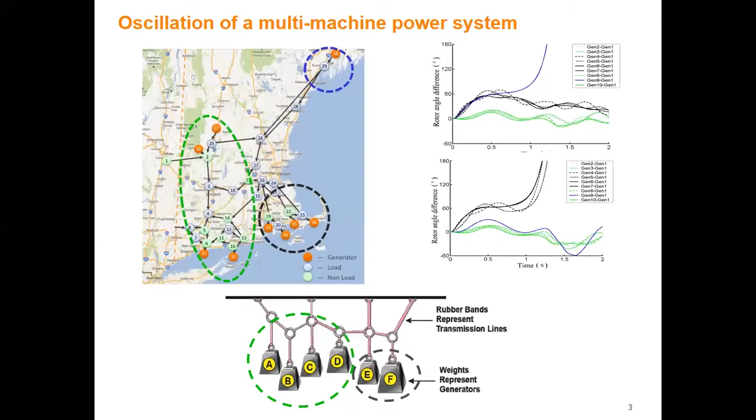Let's calculate the frequency for such a system. If it oscillates, it will oscillate at a certain period. And if it's a linear system, the linear system only has a certain number of frequencies, and each of them is actually constant. That's why we call them a harmonic system.

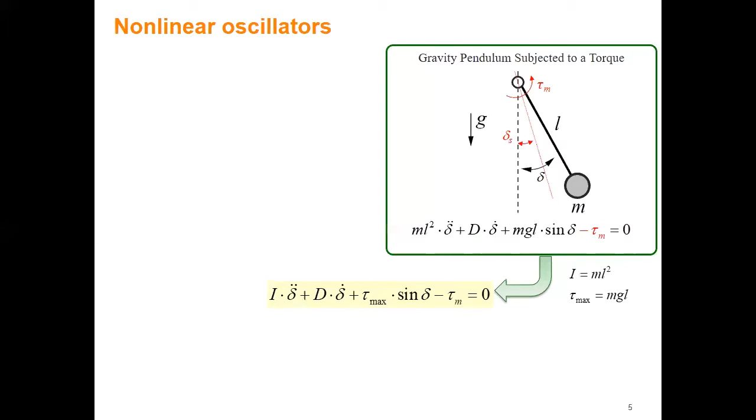But you also can define the inertia. You define this part as the inertia, for example, and you also can define the maximum torque. The very interesting thing is it becomes exactly the same system. So for the simple gravity pendulum, when you add a constant torque, that is equivalent to a single machine infinite bus system. Okay. So what is the infinite bus for this pendulum system? The infinite bus is the Earth. Okay, that's why that makes a lot of sense.

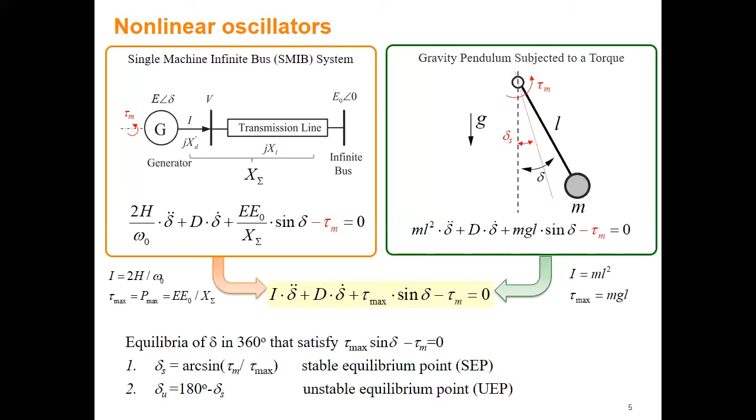And in this case, the infinite bus is just another large system. So we don't care what it is. It's too large. It won't move and it won't change any voltage, any frequency. So we just need to study this system. This system has 2 equilibrium points in 360 degrees. The first one is this one. The other one, you can easily know, is 180 degrees minus delta s. So there are 2 equilibria; the first one is stable, the other is unstable. I think many people already know this conclusion.

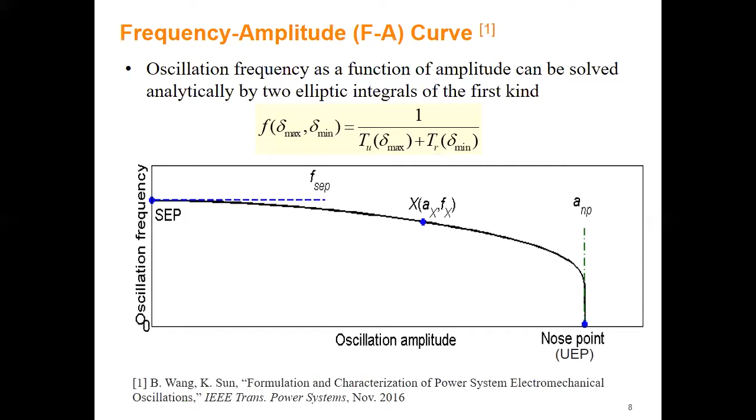But if you have damping, it finally will go back to the equilibrium. So actually, the distance between the lowest frequency point you can reach and the nose point actually tells you the margin of stability. So we can define that one to be the stability margin. Okay, so for such a nonlinear oscillator, you can analytically solve such a curve, and if the system is too complex, the theory tells you it's still somehow such a curve.

Okay, so when the system reaches the unstable equilibrium point, the frequency will lose its definition, so it will go to some nose point. And you can use a data-driven approach to try to fit such a curve. That's doable. Once you have this curve, all the system behavior will become monotonic on this curve, which is very easy to analyze the margin of stability. There's more detail in that paper if you have interest in this work.

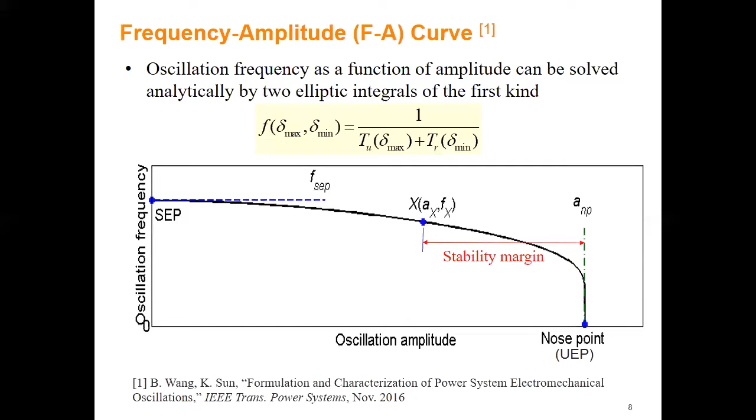So how about the multi-machine system? All the previous case studies are about a single pendulum. A single pendulum versus the Earth is actually a two-body system. A single machine infinite bus system is also a two-body system. But if we add another machine, we have a three-machine system, which becomes a three-body problem. So is the FA curve still true for such a system?

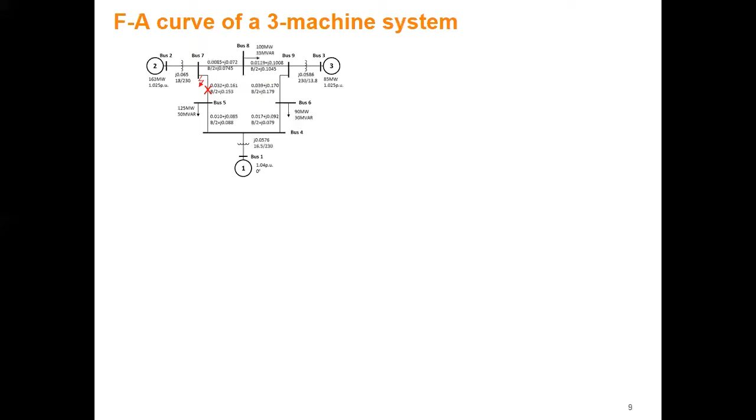This system is actually a six-dimensional system. It's a three-body system. Each machine has two state variables, which makes a six-dimensional nonlinear system. If you use one angle as a reference, you can eliminate one dimension, so it's a five-dimensional nonlinear system. And if you also define that all the damping of such a system is uniformly distributed among the generators, proportional to the inertia, you can cut another dimension. So you can simplify such a system into a four-dimensional nonlinear system.

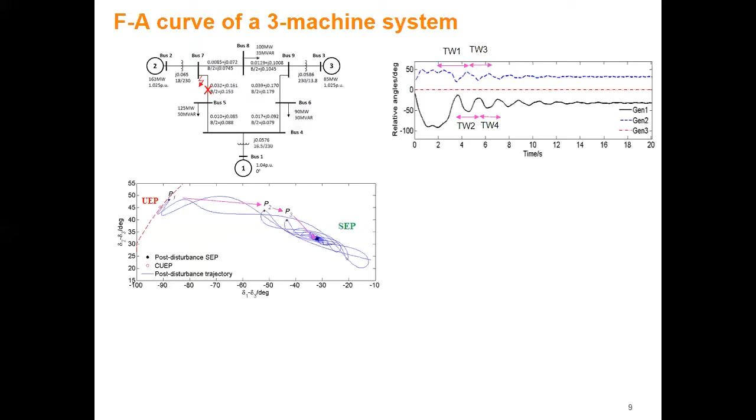This is one way to visualize. Another way is, if you're lucky, you may choose this visualization, which looks much clearer than this one. This is fuzzy, right? You don't understand what is happening in the system. But for this one, because you choose a better coordinate to visualize the system, you can tell. After the disturbance, it will jump to a point which is very close to the UEP, and finally, it will go back to the equilibrium.

Okay, so for such a complex system, if you use the traditional way to analyze the dynamics in the higher dimensional space, how easily you can obtain the result really depends on which coordinate you choose. If you choose the wrong coordinate, it's very hard to get useful information. But you can also try to generate an FA curve. The FA curve also shows it's always monotonically changing. If you have a disturbance, it will move to this point, and finally, it will come back to the stable equilibrium point. So the FA curve gives you a clear display of what's happening in the system.

So to explain why the system may have a lot of chaos before coming back to the equilibrium, this is an analogy. It's not very accurate, but it just gives you some idea. For the linear system, you can think about that the manifold is somehow linear, which is a hyperplane. So this is the blue one.

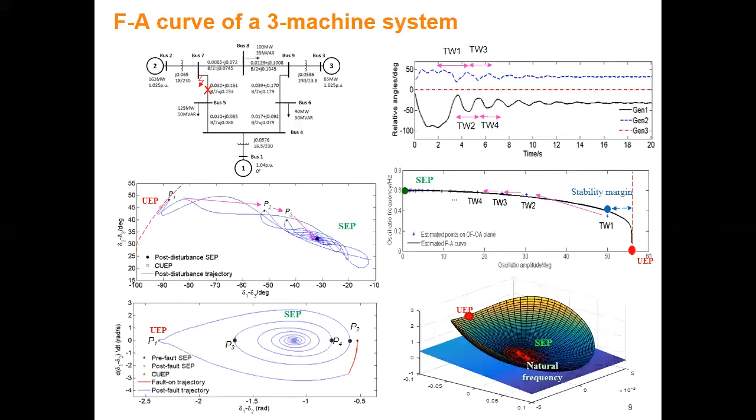But when the system becomes nonlinear, the manifold will be this concave surface. It's tangent to that hyperplane only at the equilibrium. Because this surface is concave, this manifold may also have some saddle point. The saddle point indicates an unstable equilibrium point. So that's why when the state deviates from the bottom, the frequency will change, and the system will not be like the harmonic oscillator anymore.

So how about the even larger system? Let's consider the 179-bus system. This one is a simplified version of the Western interconnection. We simulated some events very similar to the West Coast blackout in 1996. There are a lot of disturbances happening on the California-Oregon intertie to cause the separation of the two areas. If you keep adding the disturbance, you will see the oscillation grow. This represents the angle difference between the two areas.

And you can tell the waveform is actually pretty clean, which means there's one oscillation mode dominating the system oscillation. That mode is about 0.2 Hertz. If we are especially interested in that mode, we can draw this FA curve. After the first event, that's only part of the FA curve. The system state doesn't go too far away from the equilibrium, so that's why it's a very short FA curve.

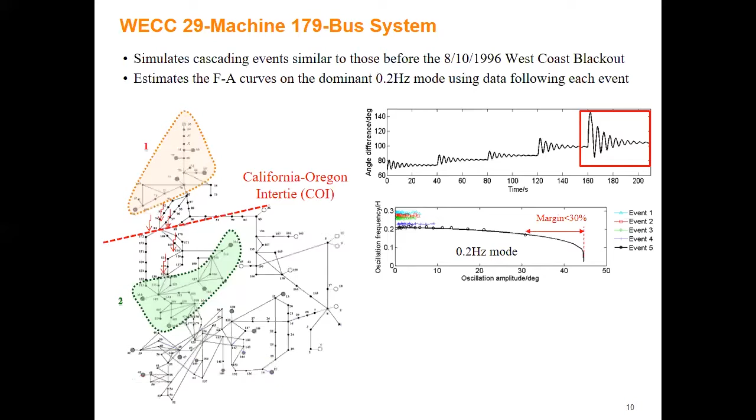But when you keep adding the disturbance, finally the largest one before the system loses stability almost gives you the entire FA curve. Actually, the system reached this point, which is less than 30% of the margin to instability. So how about the other oscillation modes? You can actually draw the FA curve for every dominant oscillation mode. Because the system is too complex, it's not easy to derive the formula for the FA curve, but you can try a data-driven approach. You can energize only one specific mode, and the system will have that oscillation. Using the data, you can draw those FA curves.

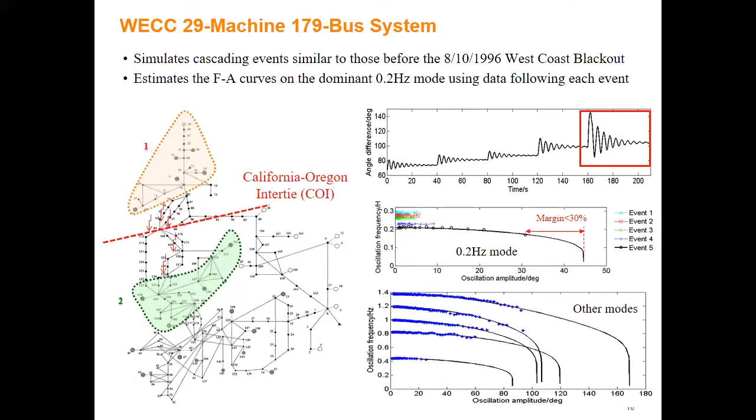So this could be some idea which can generalize to multi-machine or n-body systems. Okay, so that's almost the first topic. The second topic is some thinking following this first topic. Let's think about the n-machine power system. If we do the small disturbance analysis, which means we only have very small disturbances such that the system can be linearized, like this one, that's a linear system. And for a linear system, we can always do linear modal decomposition.

Rigorously speaking, all the eigenvalues should be different; they shouldn't have the same eigenvalue. We can do linear modal decomposition by introducing some orthogonal matrix, where we transform the original system to a new system. In the new system, this lambda is a diagonal matrix, so it decomposes all the modes. Each mode is represented by only a single state variable of the new system, related to a lambda eigenvalue. The real part of that eigenvalue is damping, and the imaginary part represents the frequency.

So this is a linear system. For a linear system, if it's oscillating, we don't worry too much. No matter how large the system is, we just need to identify which eigenvalue is critical, that is, very close to the imaginary axis, right? We try to do some control to improve the damping, and the system can be damped. But for a nonlinear system, it's a completely different story. There's no such modal decomposition.

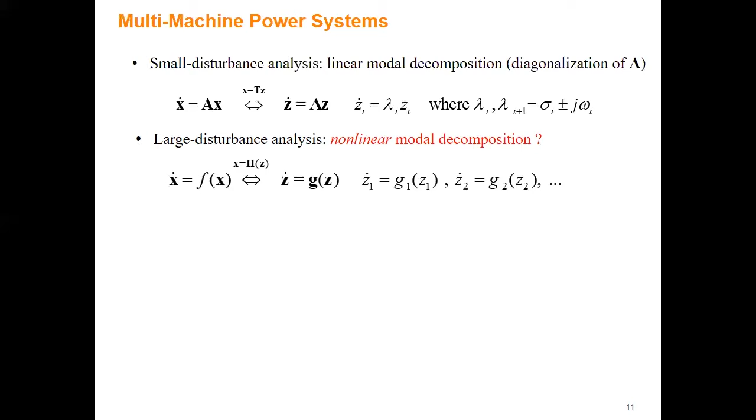You can tell, in this system the state variables are placed in a vector. Each element is governed by a nonlinear system. It's still nonlinear, but it doesn't couple with any other oscillator. So can we do this? If we can do this successfully, for this multi-machine system, if this is the mode which is going to cause instability, we don't have to study the original 10-machine system. We just need to study the system associated with this mode. That's very simple. Even though it's nonlinear, it's 1 degree of freedom, very similar to the pendulum system. That can simplify your analysis, and you can even draw the curve representing that mode. So, how can we do that?

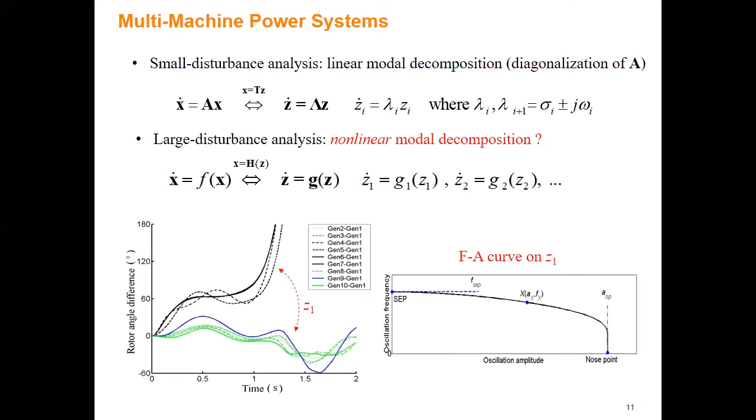So which means we want to do somehow decoupling among those modes. That's an original N-machine system or N-oscillator system. Actually, each one could be a nonlinear oscillator. They couple through the connection. For the power system, they couple through transmission lines. For that pendulum system, connected by rubber bands.

This is the original state space, which is X. And we want to introduce a new state space, which is Z. By introducing this nonlinear transformation, we decouple the original system into many oscillators. The number is n-1. So why is this n-1? Because an N-machine system has only n-1 degrees of freedom. Because if you use one machine as a reference, where does the number n go? That one becomes a non-oscillatory mode here, but that's not important to us.

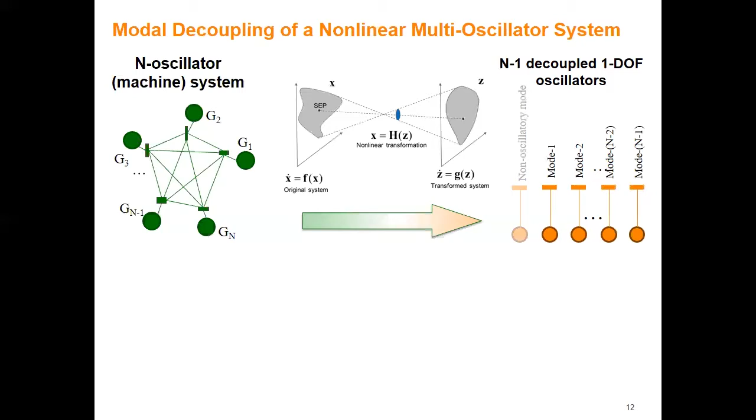That is important to frequency control. For example, all your generators speed up from 60 Hertz to 62 Hertz. That is not secure in terms of frequency. But all the generators are still stable, they're still coherent with each other. So when we study stability, we don't really care. They're entirely going up or going down. So that is represented by this non-oscillatory mode. And we have interest regarding the rest of the n-1 oscillators.

How can we do that? And there's a hypothesis. So the dynamics of an N-machine system in the neighborhood of a validity region regarding the equilibrium can be decoupled into dynamics of n-1 nonlinear oscillators. And each oscillator is a 1 degree of freedom system. This is what we get and also what we hope.

Okay, and if there's such a transformation, first of all, the transformation must be non-unique. Why? Because each decoupled oscillator depends on the desired modal nonlinearity. So I will explain what it means, and it also depends on the desired size of the validity region. So if your validity region is 0, which means this decoupled system can be applied to a region of size 0, which is just the equilibrium point, this transformation will downgrade to a linear transformation, to the diagonalization of the linear model of the system. But if you want a bigger region, the transformation will be more complex.

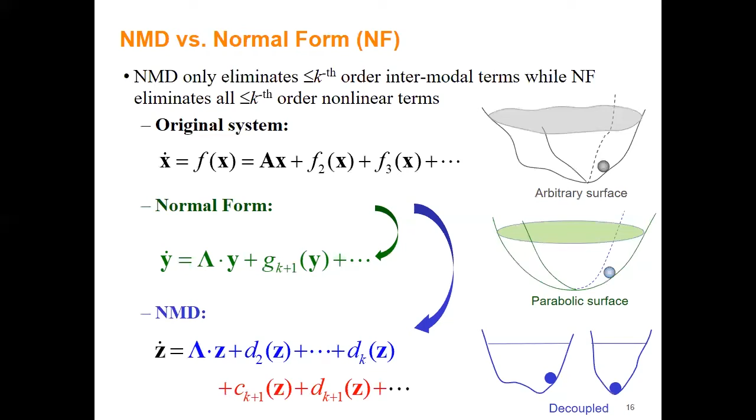Okay, so how much time do I have?

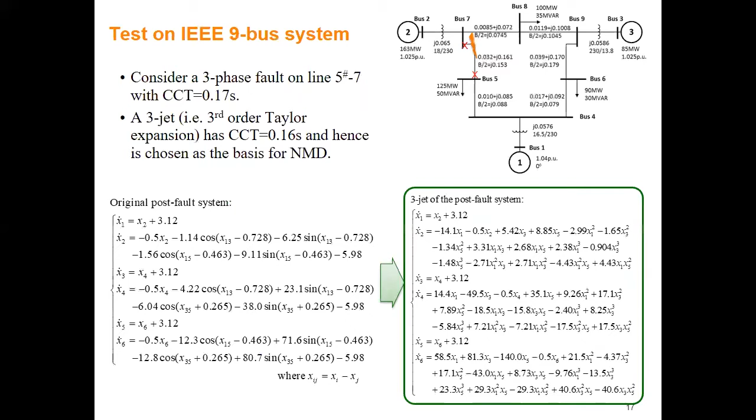Okay, I'll quickly go through some power system examples. This is a three-machine system. In order to apply the approach, we use nonlinear mode decoupling. We get a Taylor series for each nonlinear function, which is a Taylor expansion and approximation. We only go up to third order. The first decoupled system represents the desired modality, which is the same as the single machine infinite bus system. The second is another one we try to compare with that. And this is the normal form. You can tell this is a linear system.

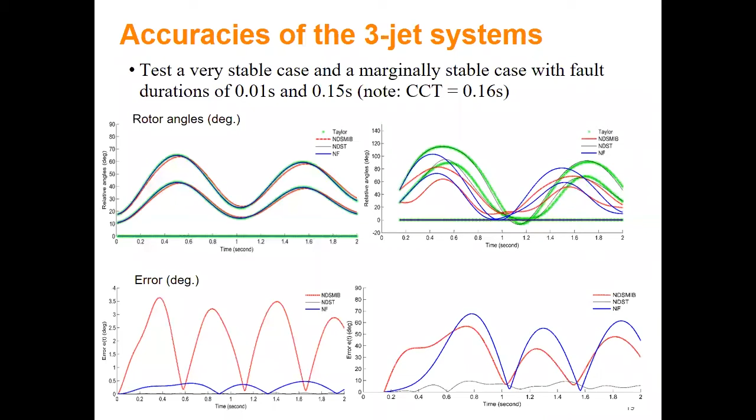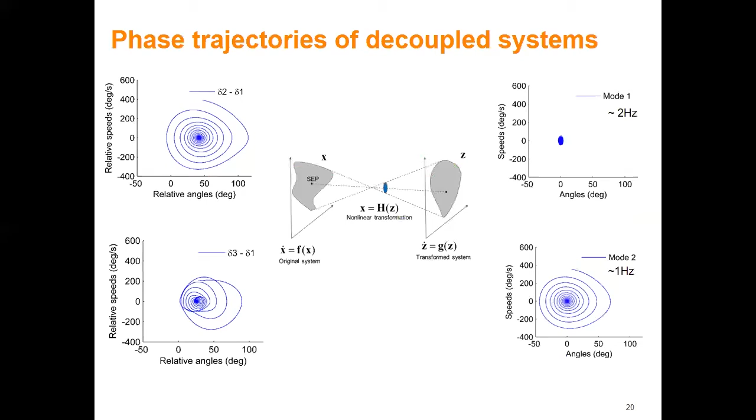And to show the system dynamics on the phase plot, that is the original phase plot in the original space. After transformation, you can tell there are two modes, right? The dynamics are mainly happening on mode number two. But for mode one, the dynamics are not very visible. It just stays around the equilibrium. So we successfully decouple the system dynamics.

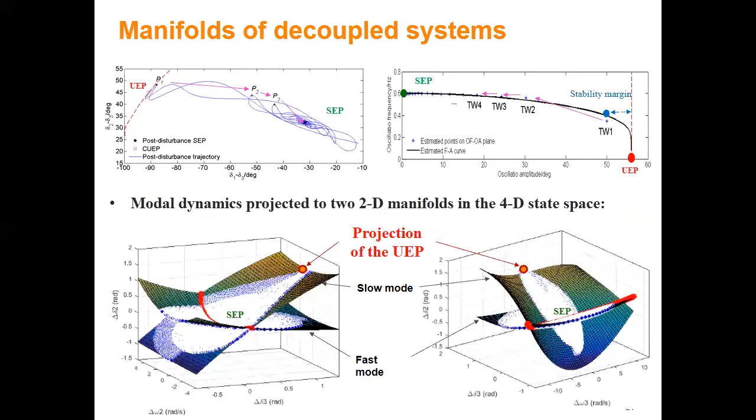This gives you a better idea of what the manifold looks like. The original system dynamics stay within a four-dimensional manifold. By the decoupling, we decouple the original four-dimensional manifold into two-dimensional manifolds, and each represents one mode. For example, this represents the faster mode, the other represents the slower mode. And you can tell from this manifold that the unstable equilibrium point is closer to the stable equilibrium point. That's why the system tends to become unstable regarding that mode, not the other mode.

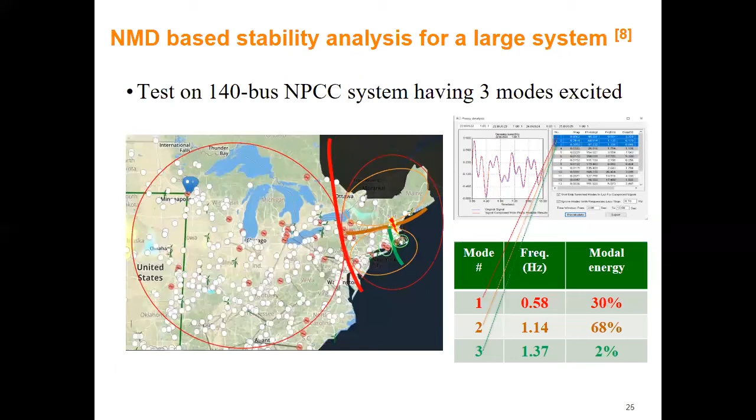So this one can tell clearly what's happening. Even if you do simulation for the entire system, you have to observe all the curves of the 48 machines, right? But this measure tells you the dynamics are really happening on this specific mode. It's pretty close to the boundary. And even the second mode, rank number 2, which still has very large energy, is far away from the boundary.